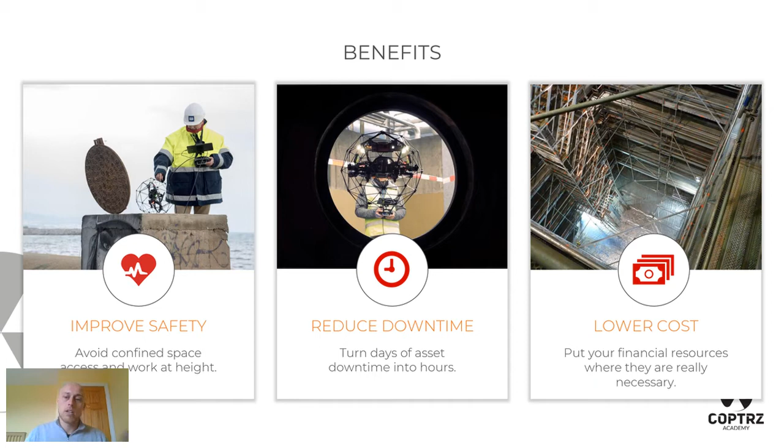Getting those initial photos or the initial video of a site is a really useful way of lowering those costs. So they do go hand in hand, and I'm sure that a lot of the industry will agree that the safety aspect is a big one as well.

This is what I think a lot of people have asked, obviously, from the last webinar to this one - the workflow was a huge one. People were asking me about what applications to use, the equipment needed, pre-planning. So I've tried to touch on as much of that as possible. Sorry if I don't answer all of the questions everybody had, but if you've got anything, we'll go through it and work through it together.

That is a case of going out there, and it doesn't matter what drone you have. We'll touch on that, and we'll recommend drones for different industries, different verticals, and different applications. But essentially you need a camera in the sky which is going to be reliable, safe, and get you good quality images.

With those images, they can then be reported on and passed on to your customers, and the quality of images and the quality of data and work that you pass on to your customer is really going to show the work rate of your company. And if you do a good job and have a lasting impression on that company, you're just going to get repeat work. We see it all of the time.

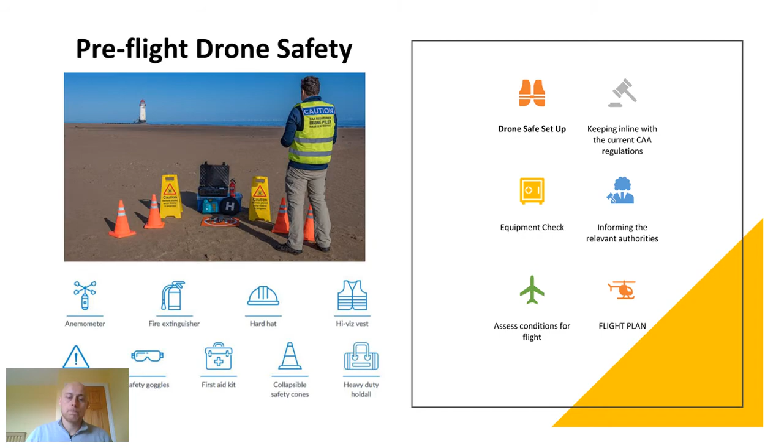You will find flying close to airports, prisons, police stations, that sort of thing, schools, you will need to get permission from the landowner. Usually it's written permission, and if you've ever tried to do it with DJI equipment, you will be shut down in the fact that DJI won't let you take off without having a written acceptance, basically. So it's just a case of saying, look, we need this, contacting the local airport and saying we're going to be flying in this location at this time, and it's really as simple as that. A lot of people get put off, and it can be quite daunting, but if you follow the procedures, follow the steps, it's as simple as that.

So that's Altitude Angel. That can be downloaded and actually looked at on your desktop as well, as an application on your mobile.

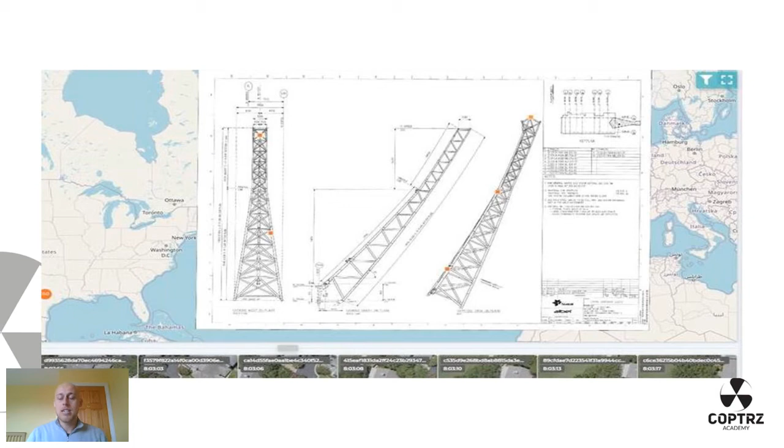Drones these days, it's very different to how the industry was 5, 10, 15 years ago. Drones are ever evolving, and it's making our lives a little bit easier.

From that, you get to see this sort of data. So the initial photo - I believe this was done with the likes of an Inspire 2 or something very similar, a 20 megapixel camera, very similar to the Mavic 2 Pro's Hasselblad camera. Essentially, they took a single photo, and then in post-process they enlarged it, zooming in on the post-process photo. And that enabled them, because they had a good megapixel camera, to get a good image they could then annotate.

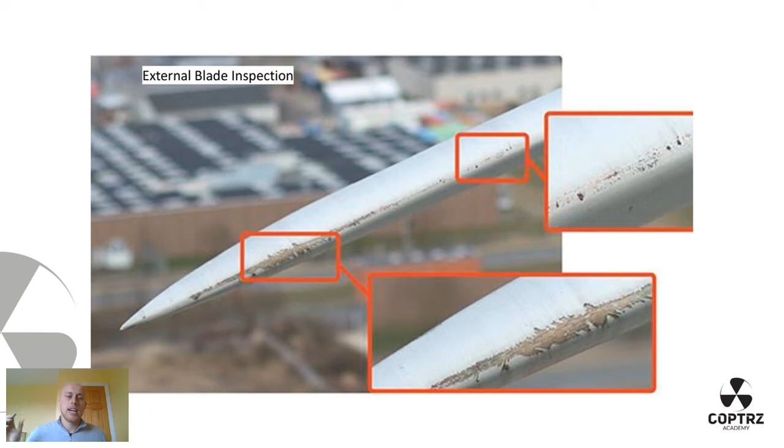So when you get back to the office or the shop, wherever you're working, you can zoom in, and you're not having to zoom in on actual site. So having a Mavic 2 Pro, take it up to whatever your target is, take lots of photos, and then take it back to the shop. You can do it in the comfort of your own home, without having to be out on site all the time taking multiple photos trying to get the perfect shot. You can take one from 10, 20 meters away from the target, and that's it. So it's a really good useful bit of kit.

This is a bit more of an internal aspect. I come from the Elios 2, so that's my sort of product speciality. I thought I'd throw this in because this is a very specialist piece of equipment.

The Elios 2, if you haven't seen it, is like a caged drone, and essentially it works exactly the same as a Mavic 2 for doing an inspection, because it gives you the ability to take lots of images and then annotate them and put them on a world map, which we'll see shortly.

As I say, identification and measuring of objects is totally possible with the Elios 2. Identification is bread and butter for the industrial inspection industry with drones. And to be honest, this is a bit of a trade secret, but what does it cost you to go through university? 20, 30 grand.

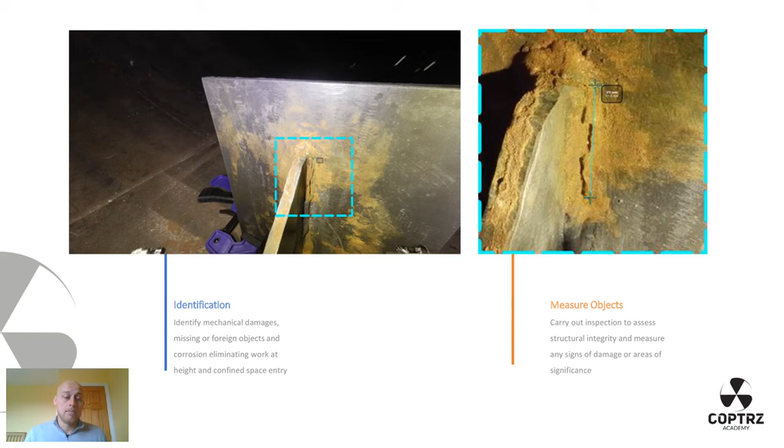To get into the drone industry, it's a case of doing your PFCO. It's a case of getting a drone and just going with it. Just do it. It's not a case of you having to go through extensive learning. If you can fly a drone and take images, you can do inspection work, because it's a case of working for the customer and saying, yes, I can capture these images and report on it. That's what they want - the raw data, the information you are seeing from your drone. It's a really good industry to get into, because there's not a lot of barriers to entry.

Now, the collection of data is always important, because once you've taken 100, 200, 300 images, you're storing them on your computer, and unless you only save the ones you want, sometimes you can miss stuff. This allows you - and we'll talk about AIVA, because it is a big talking point at the moment - it's a really good bit of kit for the inspection industry, and we're seeing a lot of inspection companies adopting it because it's so useful.

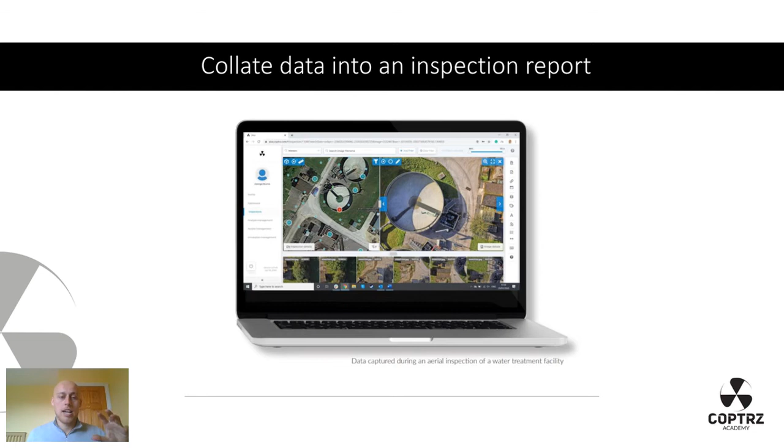It allows you to pinpoint photos and areas of photos onto a world map or onto a rendered image. So having the ability to capture multiple images and store them in a folder online on the cloud makes your computer a lot quicker, makes your life a lot easier. Then you can actually see, well, we only want to inspect the northwest building - the top right building, sorry. So then you can look at all of these images and you don't have to sift through hundreds and hundreds of photos to find the right images.

Now this particular job was actually done with a Phantom, and I believe also with a Mavic, and it was done out in the States. Essentially what they did is they flew the site, and then they went in and did a close-up inspection of some of the damaged parts of the buildings.

I did touch on this last week, but I think it's really important to show how this can be done, and how easily it can be done, because at the end of the day, that's what people get nervous about. That's when people start to lose faith in their equipment, lose faith in their ability. Seeing those images, it really does ring home that it is that easy. You're just taking photos at the end of the day and documenting them.

So a bit more of a closer look on what you're seeing. All of the orange circles are images which we've annotated, where there's damage that needs to be reported on and fixed. And then as you see, all of those images have little lines - that's the angle, the actual point of interest it's seeing. That allows you to easily and quickly look at a certain view. So if you're looking from west to east, you'll be looking at these images up on the top, because that's the positioning of the camera.

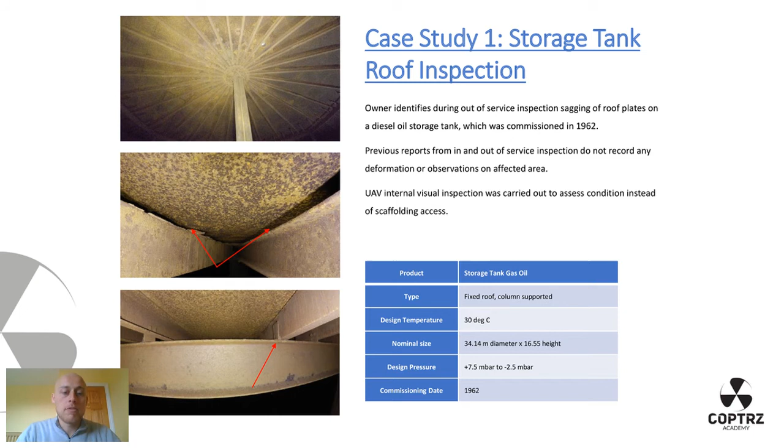Before we go on to the camera qualities, I'd like to talk about a case study and what you'll be expecting to inspect. This is more of an internal side of things, but if you look at it from a Mavic standpoint, it's a tank inspection, but a roof inspection - so you flip it on its head, you are going to be looking for problems, for damages, for anything that's going wrong. This is something the DJI series is really good at, because they are versatile bits of kit. They are really good at what they do.

In terms of the drone industry, inspection has been a huge one in the last couple of years for the industrial side of things, because traditionally you've had a bit of a barrier to customers and clients opening up their doors to new technology and new ways of doing things. And I think that's just a natural progression that a lot of industries have when it comes to new technology and new ways of achieving results.

Now, when you combine that with an increase in age, so people staying in their jobs for a lot longer, it can be quite difficult to penetrate in. But what we're actually seeing is that drones, and with the way the world is going at the moment, people are looking for the cheaper alternative and safer and quicker ways of doing things. Drones are offering that, and it can't be ignored anymore. It really can't be ignored, because they are producing some really good results.

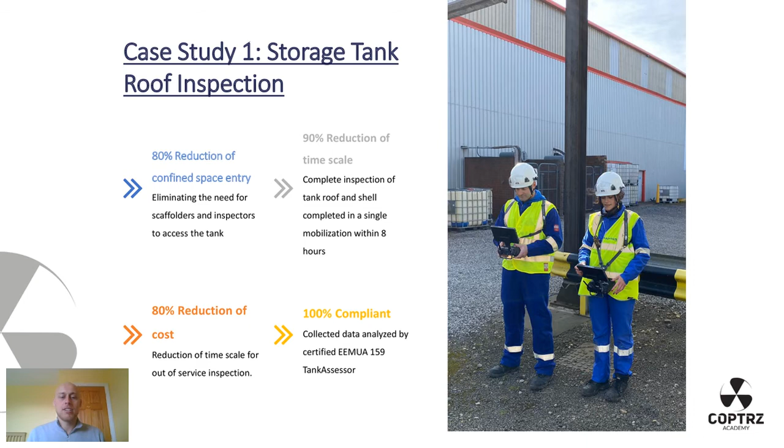That is the difference, the big difference. I know rope access companies watching this may not like what I'm about to say, but drones aren't taking over the industry or taking their jobs away. It's an asset, an assistance, an introductory application to find a fault or do something quicker. It's not going to take people's jobs away like people thought in the last 5-10 years. It's totally an asset, used by the customer to get good, reliable results.

High temperature storage tank, really good example. This was done with a thermal inspection, and I've got some good images from the Mavic Thermal that we'll go into in more depth. The thermal side allowed you to see the surface temperatures of the tank, which made it a really good tool for spotting problems - if corrosion had occurred, the actual temperature of the tank would be different, and you'd be able to assess that. So instead of somebody going around the whole building doing an inspection, it would be a drone doing it in a quarter of the time.

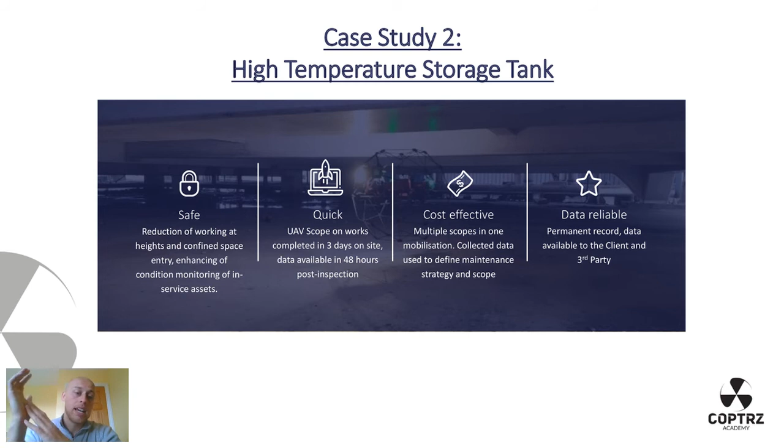I don't want to spend too much time going over the same case studies, because we have some really good images I want to show you. But it's that safety aspect, and I want to hammer this home because it's the big thing you'll be selling to your customers: safety, speed, money, and reliable data. Not a lot of industries can say something has come along and revolutionized it as much as the drone industry has.

I'll move on - importance of your camera. This is a huge one, and anyone from the photography industry will know this. You win jobs sometimes, and it's not a nice thing to say, but you win jobs on the quality of your imagery or the quality of your data, and that's just normal. It doesn't matter how safe you are or how quick you are doing something - if you've got good, reliable data, you're going to stand out. If you can say to your customer, 'I can get you the imagery you need on the first try,' brilliant. That's essentially all you need to do.

So zoom can be a really good aspect to have, but it comes with its plus and minuses. Obviously, you have to collect the data there and then - you can't take it back to the office and annotate it, you can't inspect it from the comfort of your own office.

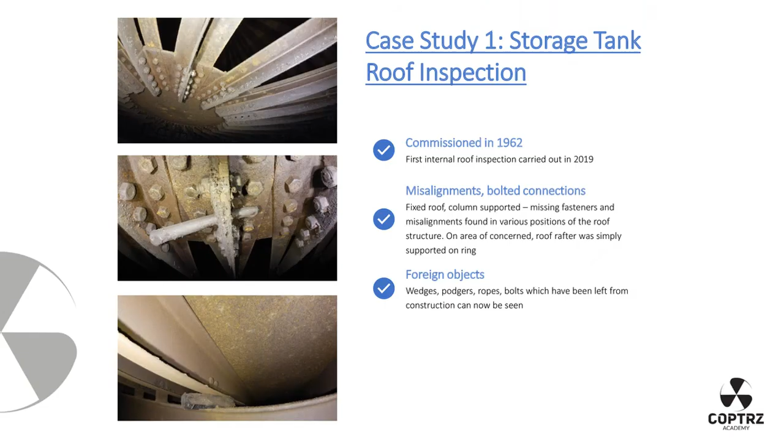I'm just trying to think of what else to go through. In terms of industrial inspection, there's a magnitude of work out there just waiting to be used by drones. You can definitely start to think about the use cases already in the industry, but it's the innovative companies who start to promote it to the companies who aren't using it. Drones came from a photography standpoint - very much cinematography and photography - and then they started to have uses in industrial inspection. We saw some of the biggest companies like Cyberhawk and Texo adopting drones very early, and I think how the industry will adopt in the future is through those innovative companies, those who can produce reliable, good data. They're the ones who are going to prosper, and if that's something you can do, it's perfect.